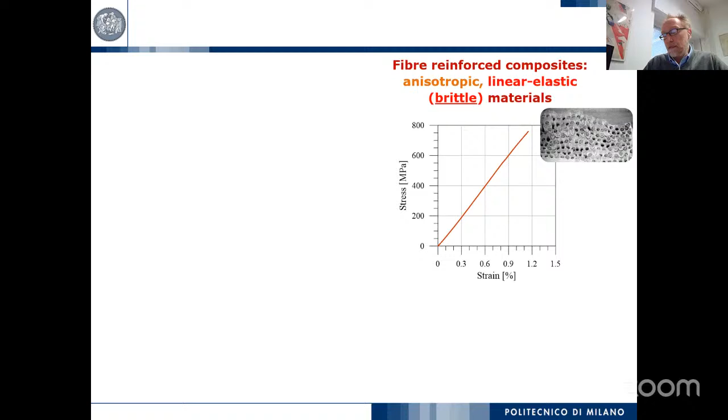In general, if you want to have nonlinearity or initial nonlinear behavior, you can manage the laminate stacking sequence, but mainly they are brittle. This has several drawbacks, meaning that you cannot predict, or you do not have any information about the damage that is occurring in the material, and so this is not reasonable in structural applications.

So we know that from metal, we can have a different behavior that involves plasticity. Plasticity means that you know where the material is working, and then you can have an alert at the moment where this material is yielding, and then you can have a further increase in the stress that can give us the chance to extend the loading range. So the question is, can we also have some similar ductility to the metal in laminates, in fiber reinforced composites, in long fiber reinforced composites?

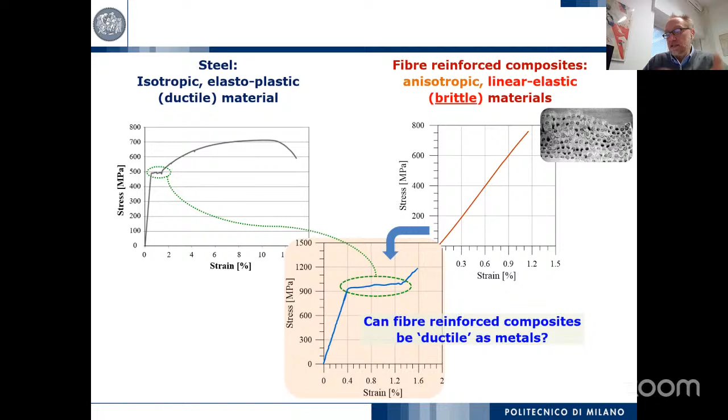Something that can help us understand the evolution of the damage, and then we can also increase, or we can extend the loading above this level. So the answer, according to our understanding and preliminary understanding, is yes, we can, and this can be done thanks to the hybridization.

You know, hybridization, there are several ways to prepare, to manufacture hybridization. These three are the main methods. I will mainly focus on the layer by layer hybridization, that is the scope of our work. But you can find in the literature many applications of the other methods.

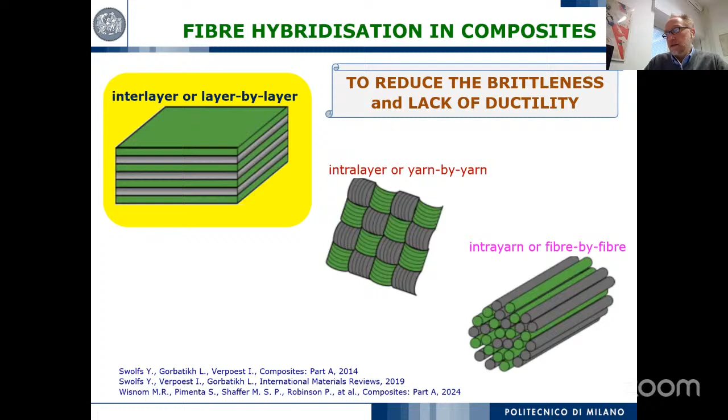Staying in this layer by layer hybridization methods, there are several works and studies that in some way help us predict the evolution and behavior of this material, to understand if we could have a chance to reproduce this pseudo-ductility that could be helpful at the application level.

There have been studies and analytical models that can be used to create this damage mode map, that can help us distinguish which damage modes are going to appear in the material according to the ratio between the two different materials we use in the laminate.

This is very interesting because we know that if we can create a sort of fragmentation in the low strain material, or fragmentation with initial delamination at the interface between low strain and high strain material, this can result in a pseudo-ductility that we can observe in the stress strain curve.

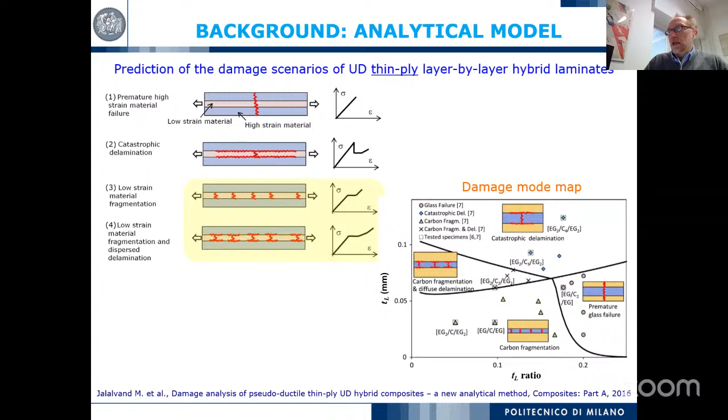So this is good preliminary understanding, and then we can use this to select the material, and then move to see if this happens in real loading conditions. And so this is our aim.

We know that if you look in the literature, you have several combinations of fibers to create hybrid composites that are mainly listed here. You have a few more, but our aim was not to continue using this coupling, but to exploit if we put together two

carbon fibers of different quality. This results in this pseudo-ductility, and the main reason for this is that if you use the same material for the fiber, this will, from one side, enhance the mechanical property because we are using carbon. On the other side, we can reduce the density because of this fiber.

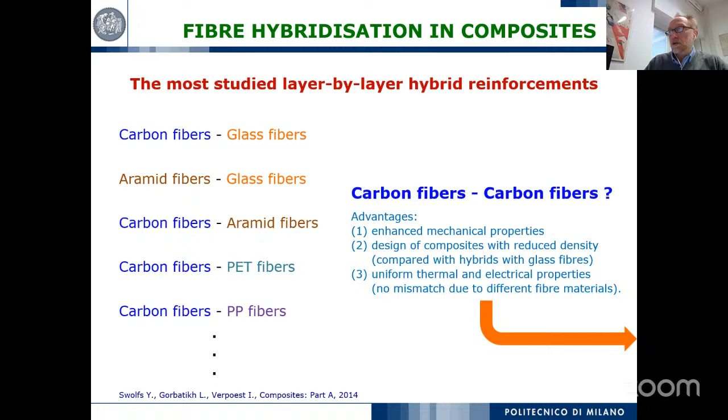And last but not least is the uniform thermal property and electrical property, so we do not have mismatch in the material. This is the reason why some research groups work on this hybridization, and this is what I'm going to present you, using the same material for the fiber.

One fiber has high elongation, one fiber has low elongation, and this helps us create this progressive damage mechanism that leads to pseudoductility. In the past and in the literature, you can find good work related to this all-carbon

fiber hybrid laminates that are mainly focused on thin ply, because the thin ply allows you to create this sequence of damage modes. So you have quite a number of works on this with thin ply.

On the other hand, if you think about thick ply that are more used in applications, there are not so many works on this aspect, and even less for quasi-static tests—there's no work or study on the fatigue behavior.

So our main scope was to extend this knowledge to thick ply of different lamination schemes, including also quasi-isotropic laminate, extending our study to quasi-static, but not only—also to fatigue test or fatigue behavior—and then moving to predictive models that can help us design the laminate according to the peculiar feature of this pseudoductility.

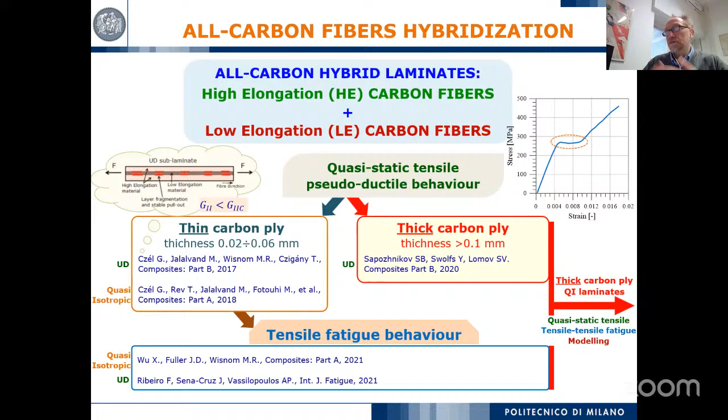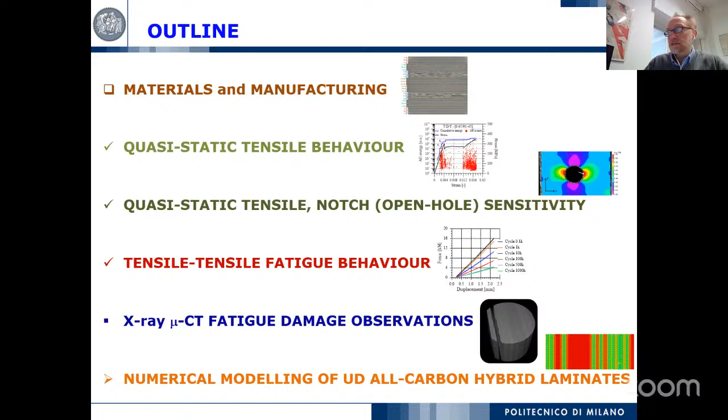So this is the outline of my presentation, which will present an overview of the work that has been done on this thick ply all-carbon laminate, starting from the material features and then moving to the understanding we had with different loading conditions, including observation of the damage inside the material, and finally moving to the numerical model that gives us the opportunity to predict the pseudo-ductility of this material.

As for the material, as I mentioned, we use two different kinds of carbon fiber with different elongation at failure and different elastic modulus. Those are listed there: this is the high elongation fiber, this is the low elongation fiber.

We also investigated the influence of the sublaminate. So what is a sublaminate? It's a sequence of pre-preg including these two fibers. In this case, we have high elongation, low elongation, high elongation. This sublaminate is mentioned in the laminate stacking sequence as the orientation.

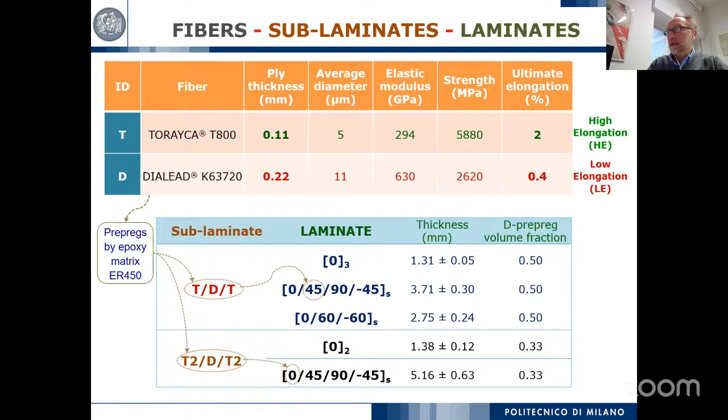And we investigated also another sublaminate scheme to create unidirectional and quasi-isotropic laminate. So you see here, on this side, the thickness that are more frequently used in applications, and the content of the low elongation fiber in the laminate. This is interesting to understand the final mechanical behavior of the laminates.

Moving to the manufacturing, to understand if manufacturing has an effect on the mechanical behavior, we used both hot press and autoclave with this manufacturing cycle after the layup.

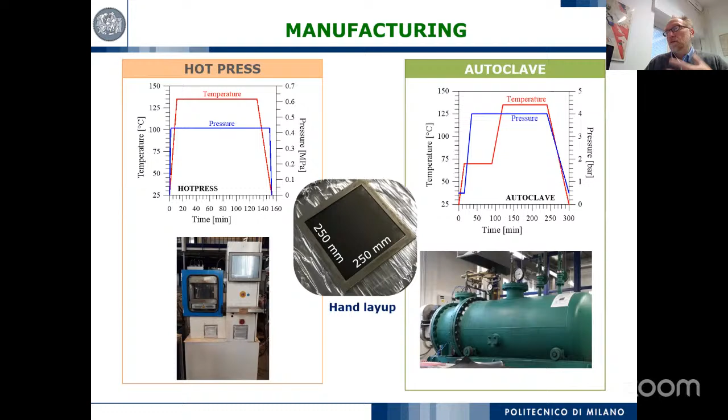The first step was to understand and assess the quality of the manufacturing, and this has been done with observation using micro CT to measure the fiber misalignment in the high elongation and low elongation plies.

For all the stacking sequence from unidirectional to quasi-isotropic laminate, we can see that in terms of fiber misalignment, the manufacturing process does not give a huge difference. Mainly the misalignment that is not so relevant is mainly in the high elongation ply.

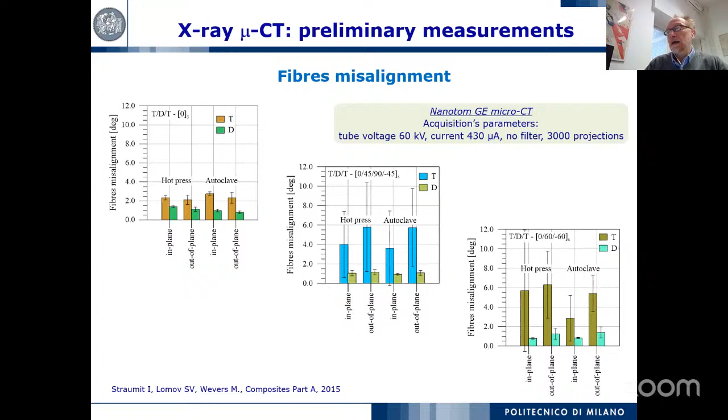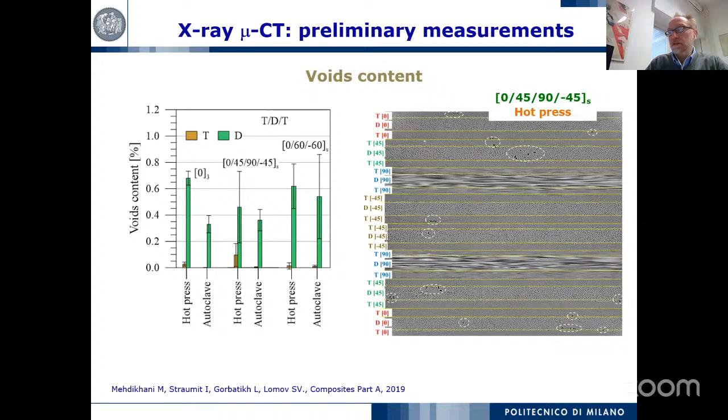On the other hand, if you look at the void contents measured with micro CT images, the void contents that is quite reasonable for many applications is mainly in the low elongation ply, in the D ply. This is also not so different comparing hot press and autoclave. So from this aspect, the two manufacturing techniques give almost the same quality of material.

Moving to the mechanical behavior, we investigated the quasi-static loading for all laminate and all sublaminate, for the two manufacturing processes. We also included the open hole test to assess the notch sensitivity, and then finally the fatigue loading. At the beginning we tested all the laminates I mentioned, and then moving to open hole and fatigue, we reduced the number of materials and laminates because of the material we had available at that time.

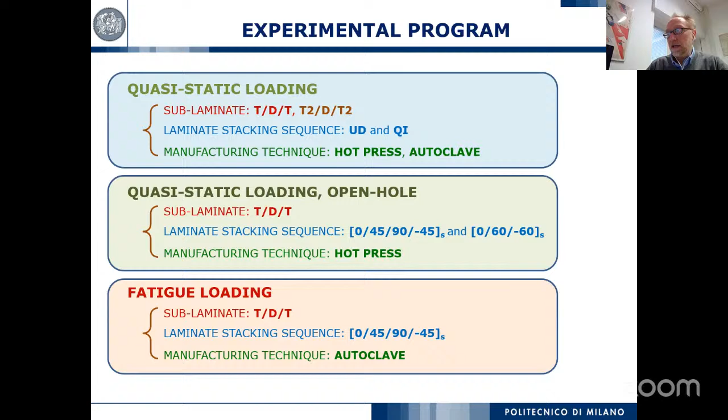Moving to the static test, this is a quite standard setup that includes acoustic emission recording, digital image correlation observation, and also clip extensometer to have measurement of strain with two techniques. So we put all together.

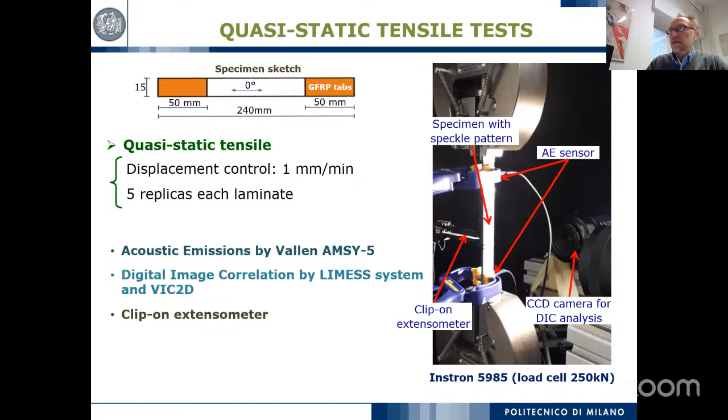This is the final overview of the stress-strain behavior in tension, where you can see what we want to have, shown in the schematic on the bottom left, including the pseudo-ductile stage. We have this in the results of the tensile test.

What is interesting to observe is that the first branch of this curve, when the failure happened in the low elongation ply, the first branch slope is mainly driven by the low elongation material, which has the higher elastic modulus.

Also interesting to observe is that this pseudo-ductile range, in terms of strain range, can be different according to the laminates, the stacking sequence, and can also present different shapes. So here it is more flat, here it is not, according to the different sublaminates. This is a consequence of the sublaminate and, obviously, of the stacking sequence. But let's go more into detail to distinguish in terms of mechanical property.

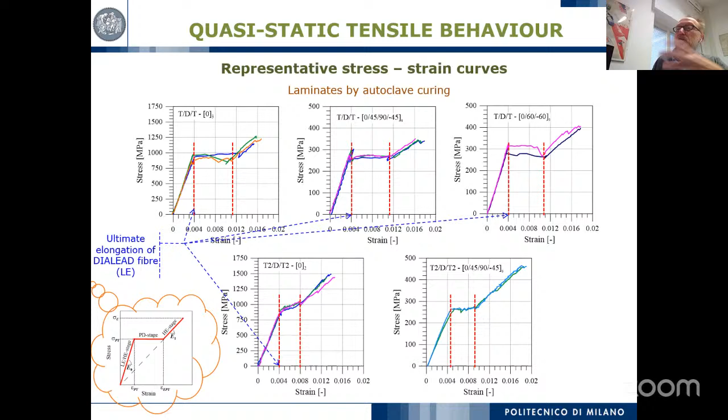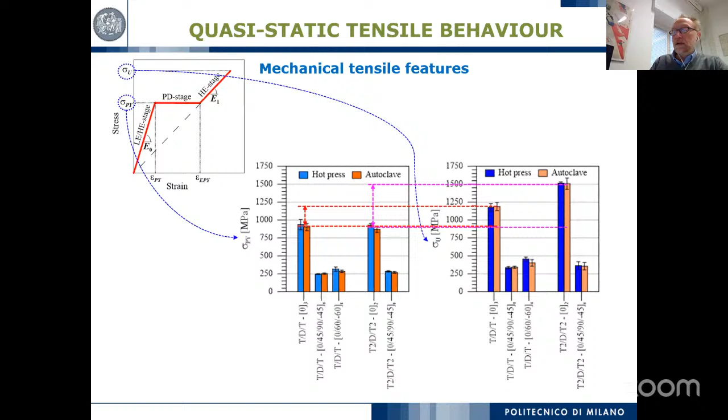This is also visible when we compare the stress at the pseudoductility level, where this pseudoductility starts, and the final strength of the material. This shows us that changing the quantity, position, and orientation of the different carbon plies, you can create a smaller or larger gap between the two values. This is very interesting in application, because when you are at this pseudoductility range, you know you have further space for increasing the load, so you can know exactly where your material is working.

If you change sublaminate, the delamination starts but does not increase from one position to the entire specimen. It can appear at different positions, different beginnings of the delamination in different positions of the material, and this gives you the difference in this pseudoductility plateau.

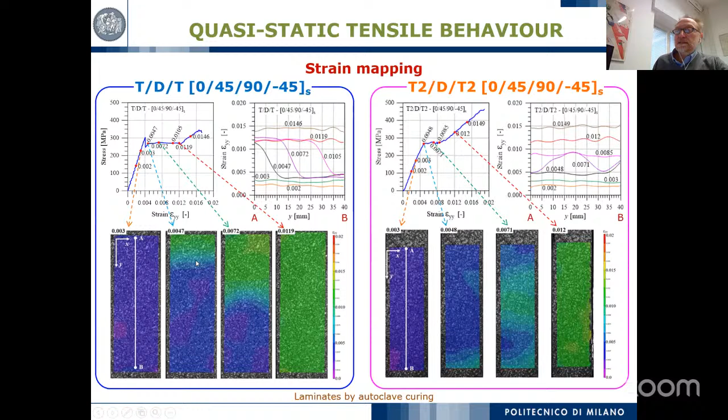This plateau is much shorter than the other, because the delamination appears in different positions, and the evolution is much faster than the first one. This could also be visible for the quasi-isotropic laminate, with the delamination starting and slowly moving through the specimen, which is different than the other sublaminate.

I would also give a comment on the difference between thick ply and thin ply that you can see in the literature. In thin ply, which I will show you later in the modeling, you have several fragmentations and the delamination starts at the position of the fragmentation. In thick ply, the fragmentation starts, and then the delamination at that position starts and moves progressively through the entire model, through the entire specimen. So it's a slightly different mechanical evolution of the damage between thick ply and thin ply.

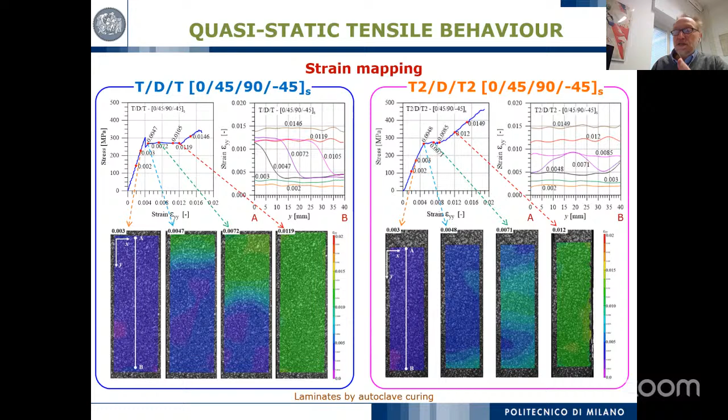But finally, what we observed is that this range of pseudoductility appears also in the thick ply laminate.

Moving to some observations with the acoustic emission, this is a recording of the acoustic emission during tensile test compared to the stress strain curve. You see that the main difference between the sublaminates is the acoustic recording during the plateau.

In this plateau, the main damage is in the first branch where you have cracking in the matrix, then fragmentation starts, and this looks to be the time where we have progressive delamination.

This progressive delamination, as I mentioned, is completely different changing the sublaminate, where in the case of the second set of sublaminate, this is very noisy because it's much faster. You have different positions where the delamination starts, so you can have quite completely different pseudo-ductility behavior, if this can be named pseudo-ductility.

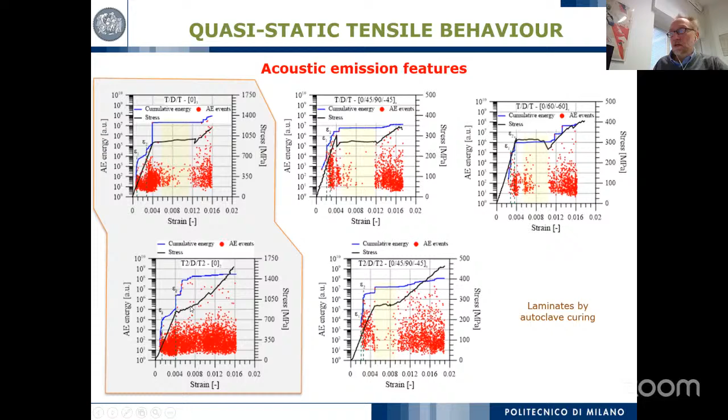Moving to the behavior in terms of notch sensitivity, this is quite standard, same setup, same measurement technique. In this case, we limit our test to the two quasi-isotropic laminates, and you see here only the beginning of the plateau, so when this starts, the first fragmentation, and then the beginning of the plateau in terms of pseudo-ductility.

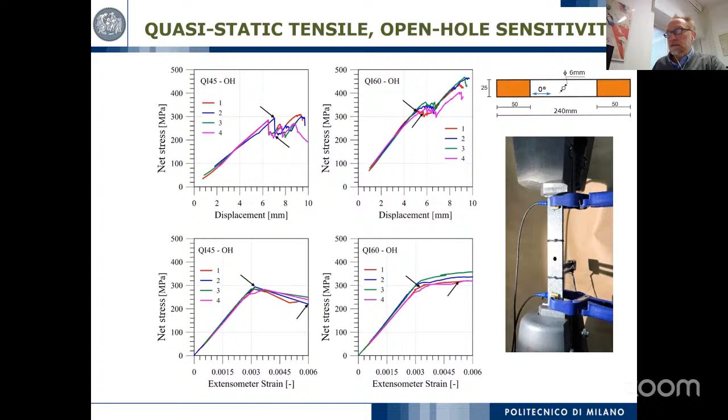It's interesting to observe the damage evolution in terms of strain map, which is quite typical in this case for a circular notch, where you have stress concentration at the boundary of the notch. If you look at the shear strain, this distribution is visible, and that's the information we have to understand that the delamination is starting at that position.

This happened for the two different loading scenarios shown here, meaning at the top, at the first fragmentation, and immediately at the beginning of the plateau. This is quite similar for the other quasi-isotropic laminate, showing the distribution of the strain during loading, mainly at the beginning of the plateau.

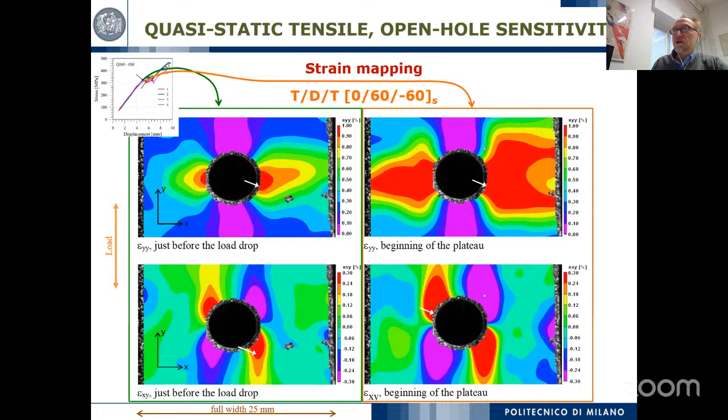But what is important is the notch sensitivity, because this pseudo-ductility, or this increase of strain that we can get at this load level, gives us good understanding of the notch sensitivity, which I show here both in terms of notch sensitivity at the stress at the plateau level, and also at the final strength. You can see that the notch sensitivity is quite good, we are close to 1.

That is, namely, we have the same response as the unnotched material, and this is reasonable, and this is due to this distribution of damage in the more stressed part of the material that allows you to exploit this range of pseudo-ductility, and then continue increasing the load also at higher strain level.

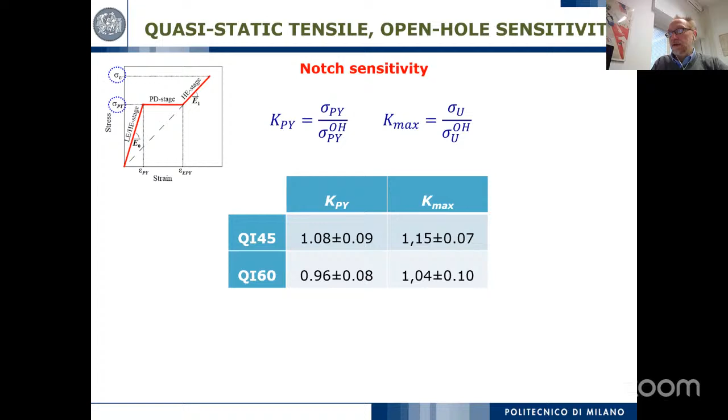Moving to the behavior in terms of fatigue, we limit our test to tensile loading, and we limit this test to quasi-isotropic laminate, changing the control of the test. We have some tests with stress control with a 0.1 ratio at 3 different stress levels, from 90 to 100% of the stress at the first peak, so at the very beginning of the plateau.

We also have strain control tests with 8 levels of strain from the beginning of the plateau to the second branch of the static strain curve. This helps us understand if the pseudo-ductility can help us sustain or have longer fatigue life, or not.

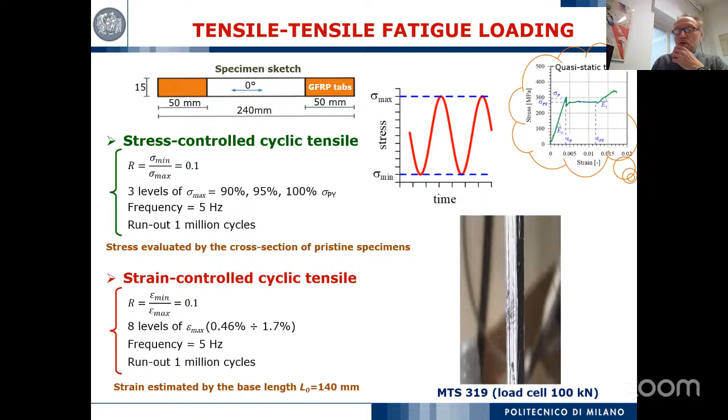Moving to the results in terms of stress control test.

This is the range on the static curve, and here is the fatigue life in terms of the maximum stress in the cycle. You can see that if we are at 90% of the pseudo at the beginning of the first peak, we have long fatigue life—we stop at 1 million cycles. But if we get closer to this pseudoplasticity stress level, the fatigue life becomes shorter and shorter, meaning the material cannot support this stress level for longer.

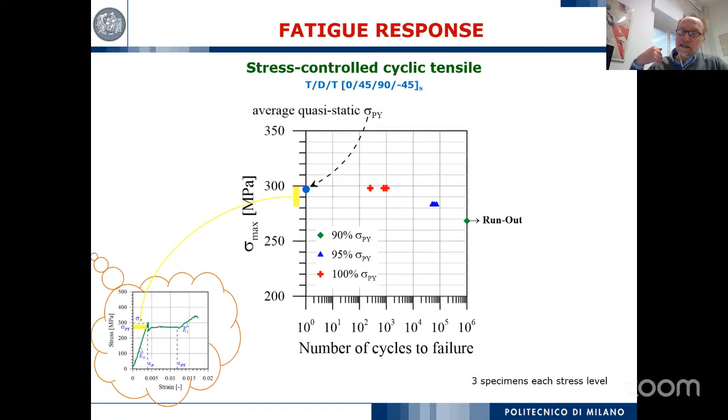The reason for this is that when we reach this level, fragmentation starts, and keeping the same stress level, the material has fast evolution of damage, then jumps to the other branch of the static curve, leading to faster failure.

In summary, if you look at the evolution of the stiffness of this material, or the slope of the stress in the cycle, we have very good retention of stiffness if we work at 90% of the pseudo-ductile stress, but this will immediately drop if you are very close to or at the stress of the first peak.

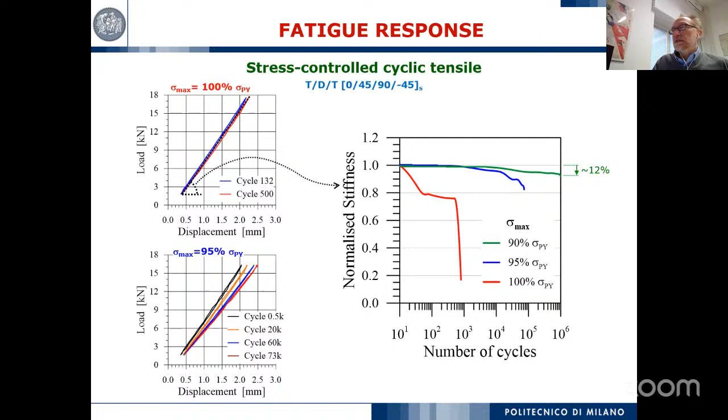Contrary to this, for strain-controlled material we used a much larger range for testing, starting just after the first drop or first fragmentation, and also using strain levels close to final failure. What we observed is that all the strain levels we tested led to no failure after 1 million cycles, except the highest strain level, very close to final failure in static loading.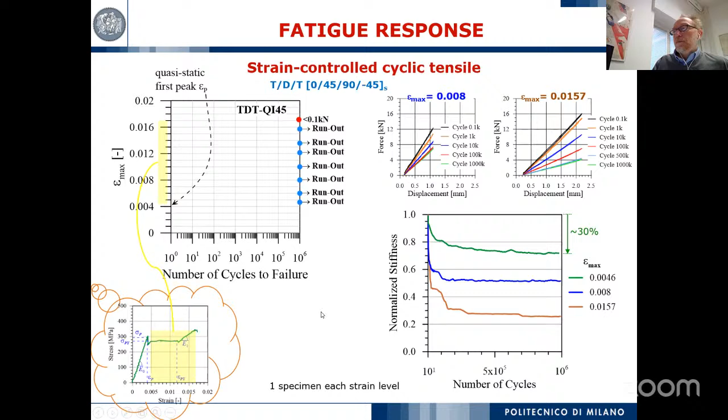This is good information, because even though you have a reduction of stiffness during loading, your material does not fail and still continues to sustain the load for a relatively high number of cycles. This is motivation, I would say, for this good behavior related to the pseudo-ductility range we observed in the static test.

The red symbol shows the stress level at the beginning of the fatigue test, and the blue one shows the stress level at the end of the fatigue loading. You see that when you work in the pseudo-ductile range, your material continues to keep the load with probably a lower level of stress, and this stress level slowly moves, increasing the strain level, moving along a segment whose slope is similar to the second branch of the material.

What does this mean? It means that the material, after the fragmentation of the low-strain layer, transfers the load to the other ply with the high-elongation layer, and that continues to sustain the load for longer fatigue life.

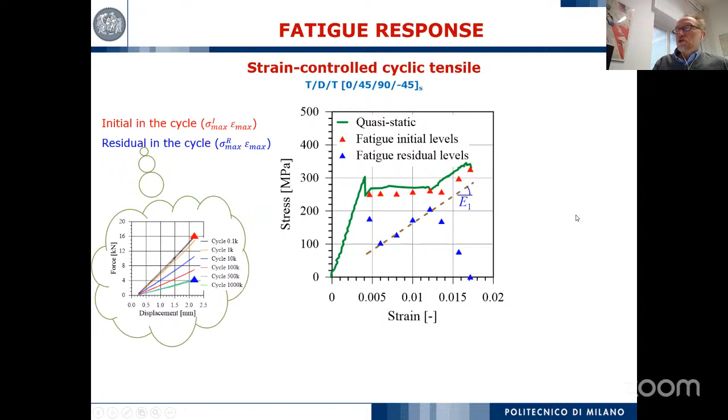Obviously, when you are in the second branch with strain in the second branch, this means you have fragmentation in the low-strain layer. You start failing some fiber and ply in the high-elongation layer, so this slowly moves to shorter fatigue life with final complete failure. But what's interesting is that we can exploit this pseudo-ductile range to achieve good or longer fatigue life, even though we sustain a smaller range of stress—your material does not fail completely.

So why does this happen in terms of damage mode observed inside the material with micro-CT? This is an observation of one sample cyclically loaded at this strain level after 100,000 cycles, meaning we are working at this level in terms of reduction of stiffness and strain level. You see what we expect is this fragmentation or intra-ply crack, which mainly happens at the 45-degree ply.

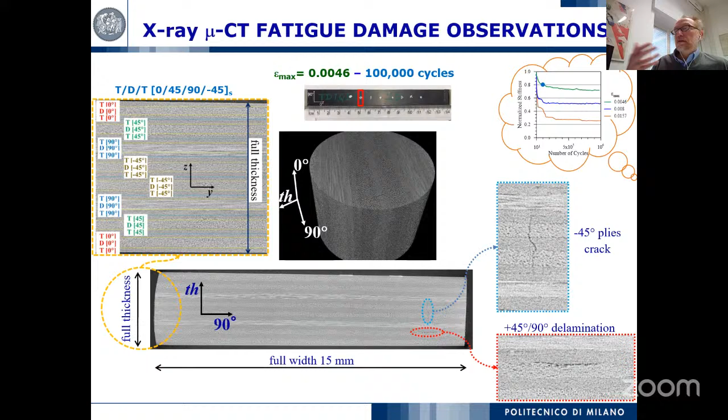This will gradually and slowly move to the interface, and this is what we expect in terms of evolution and sequence of damage mode. As the number of cycles increases, this fragmentation will multiply—you have multiple fragmentations, mainly in the same ply.

This fragmentation converts to delamination that finally leads to complete splitting of the material, with delamination occurring after 1 million cycles. But even after 1 million cycles, even though you have such huge delamination here or in another position, the high-elongation ply still continues to carry the load, so your material does not fail completely.

The main damage mode observed after 1 million cycles, as mentioned, is splitting in the zero ply. You have transverse cracks that mainly start from the edge. This is almost standard, and also you have cracks along the fiber in the 45 ply, starting the delamination. The delamination mainly happens at the interface between the 45 and 90 degree plies. This is what we have seen in the experimental tests with different loading conditions and different laminates.

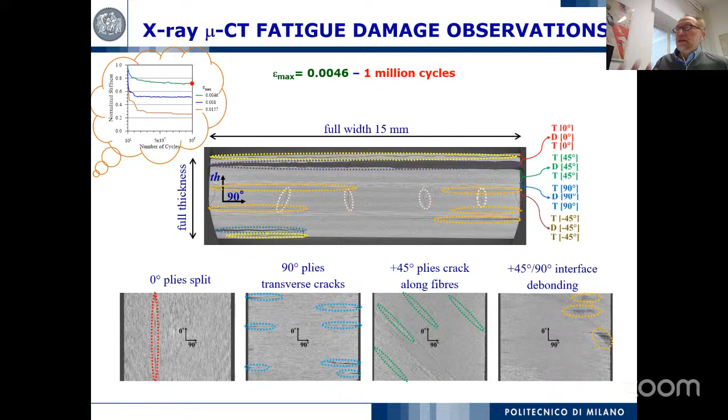Now, our question is, can we predict, can we have a model that can help us predict this behavior? So we tried to develop a finite element model. It was, in this case, limited to unidirectional laminate because it's probably the most interesting in terms of this pseudo-ductility, and it was limited to quasi-static loading too.

What we want to reproduce in the model is the sequence of damage modes that we suppose, and that we have seen, in the experimental tests. Mainly what we simulate is the fragmentation in the low elongation ply, and this has been simulated by introducing transverse cohesive elements at different positions, at a certain distance that was lower than the recovery distance for this material. And we also want to simulate the delamination.

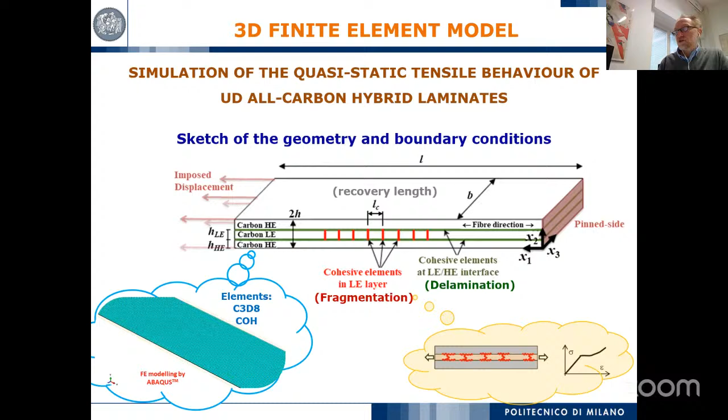So we use cohesive elements at the interface between the low and high elongation ply. What we want to simulate is exactly this damage mode evolution, to create this pseudo-ductility behavior. This was performed using a finite element model in a commercial finite element code.

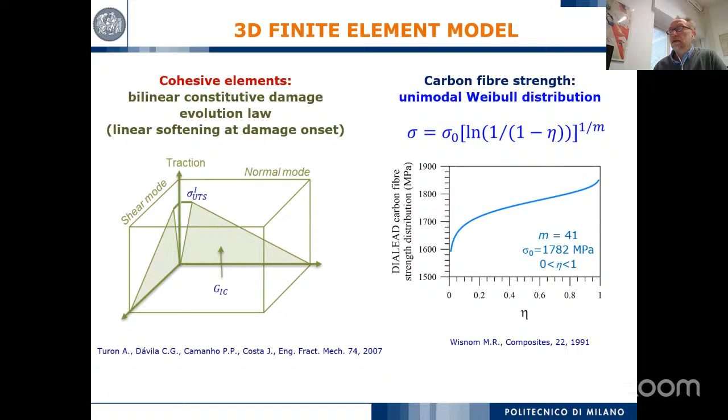In terms of detail, I don't want to go into the cohesive element damage evolution, that is quite standard. I just want to mention that we also introduced variability of the carbon fiber strength using a Weibull distribution, and this allows us to change the strength of the fiber, which is very well known assuming this distribution, so we can create a variation of strength inside the ply and along the length of the ply. This is interesting and important because this happens in the real material.

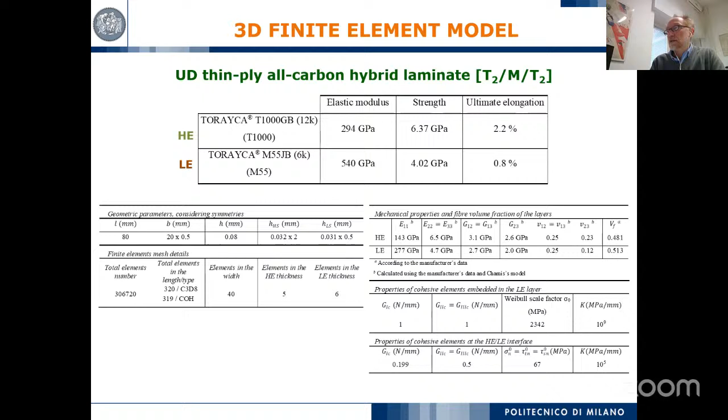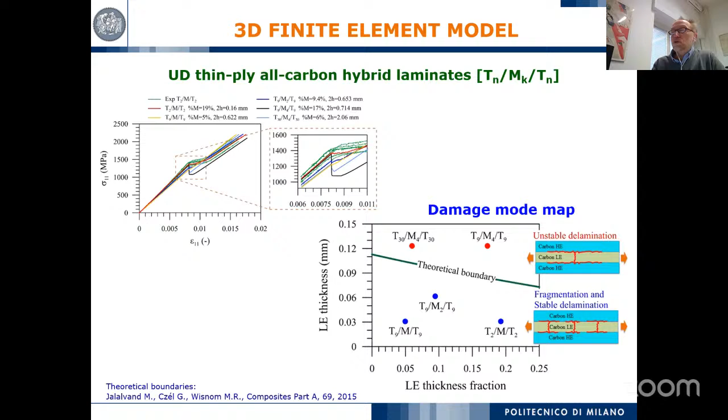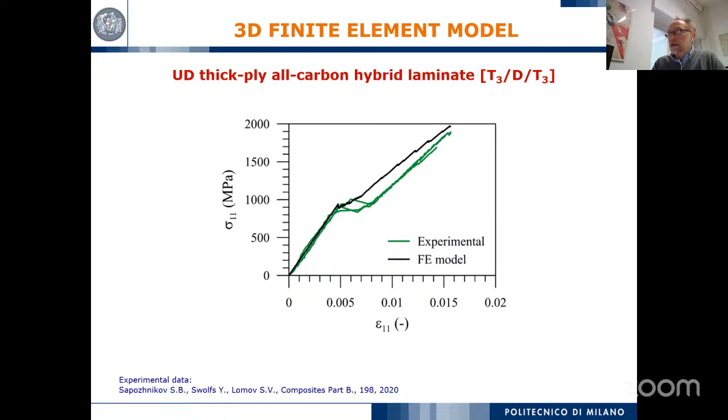Now moving to the sequence I showed in the experimental test, including these two fibers. This is the result in terms of stress-strain that in some way predicts this plateau, not exactly similar to the experiment - this is mainly due to the measurement in the experimental test and the jump during the first failure. But it's interesting to observe the difference between thick ply, this one, and thin ply, the previous one.

In this case, you see that we start the fragmentation, and then the delamination is much larger and goes through the entire laminate - it's not limited to the position of the fragmentation. This is the difference between thick ply and thin ply, and finally this is the difference between the two pseudo-ductile behaviors that you can create by changing the thickness and the laminate stacking sequence.

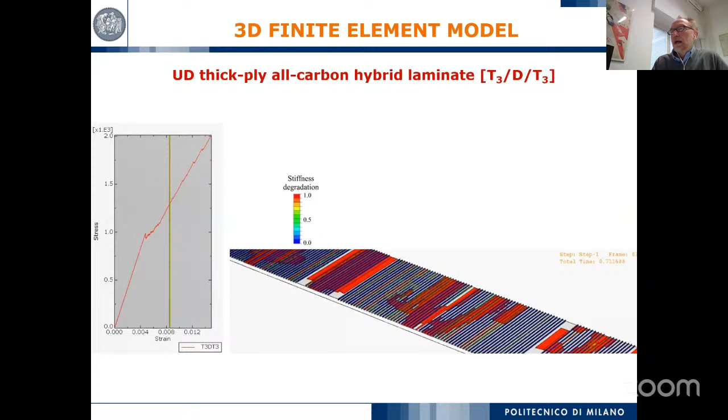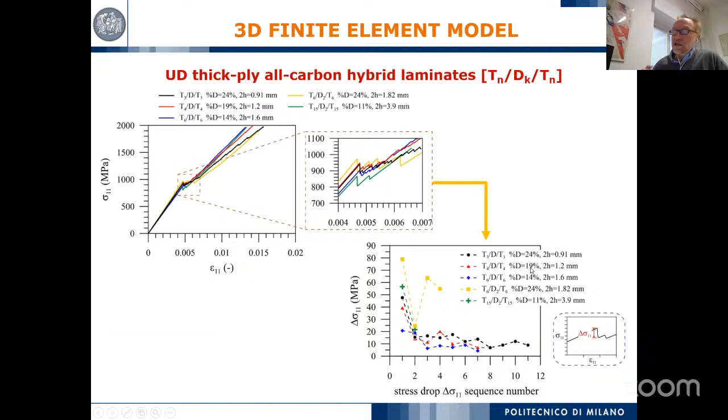The pseudo-ductile behavior, meaning when we can have fragmentation and stable delamination in the material that creates this pseudo-ductility. So finally, the message is this carbon-carbon hybrid laminate could be an interesting material because it's a single material in terms of fiber.

We can create, and in some way control, the pseudo-ductility, and further to this, we can also have a model where we can predict and simulate the damage in this material, having a finite element model like this that can give you also an overview of the damage evolution through the whole volume of the material.